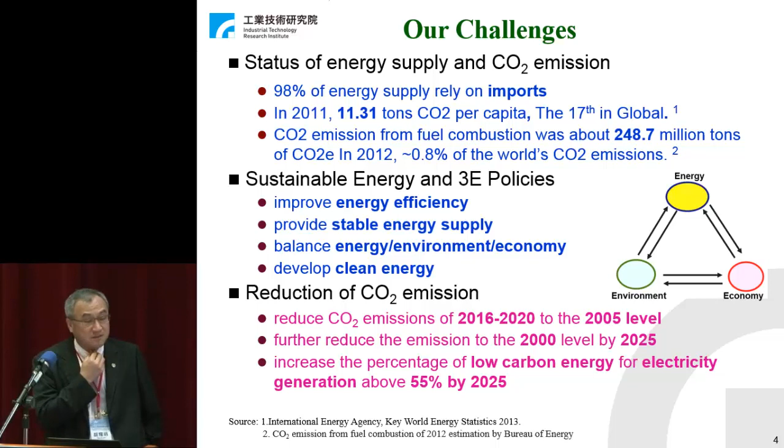For oil and gas, you can just read it—it's very tough. In simple terms, energy efficiency right now in Taiwan is a little easier to reach the target on, but the problem of CO2 emission is very difficult. That's my comment here.

This is our energy consumption pie chart. If you look at the left-hand side, most of the energy consumed is in the energy sector, which generates electricity for people to use. Looking at it differently on the right-hand side, industry consumes most of the energy at 48%, transportation about 14%, commercial and residential combined around 26%, and the energy sector for power plants and home use is around 11%.

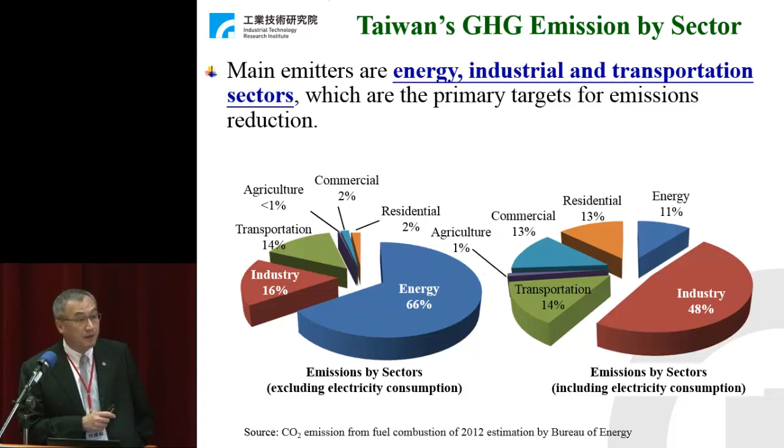Let's take a look at the carbon storage potential in Taiwan. I think our previous speakers were very clear on the differences—they reported on large pilot scale programs around the world. I believe the capture technology is purely R&D, and compared to the storage side, the storage program here is easier than the capture program.

Our storage capacity, from our estimation: onshore we have around 2,800 million tons for the oil and gas structures. Coastal and offshore, we have 9,000 to 68,000 million tons. This is all around the western coast, which is also where all the power plants are. In one way it's good, since most of the power plants and industrial parks are located on the western part, so it's suitable for study, looking at sedimentary basins or rock formations, etc.

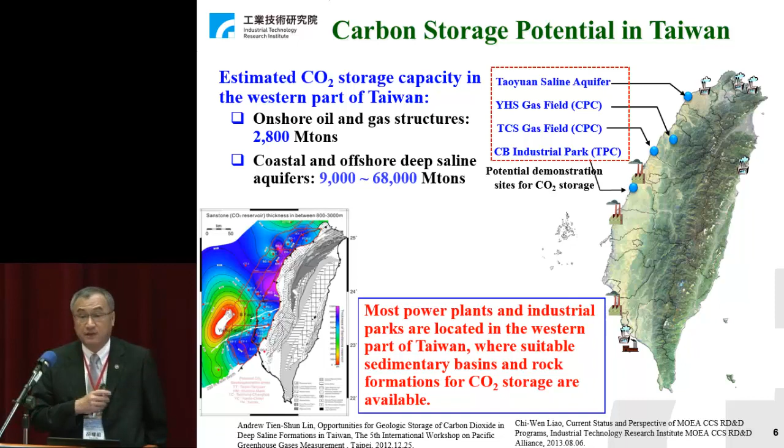In our study, we think the general consideration for CCS research, development, and demonstration—we try to focus on two emitters, I think everybody does the same thing. One is power plants, the large emitter. The other is industrial, like cement, iron, or others. And for carbon storage, we're looking at gas reservoirs here in Taiwan and deep saline aquifers.

I think technology integration is important here. It doesn't matter which way you go—how to make it work, how to make it cost effective, and improve the energy penalty. This kind of thing is critical.

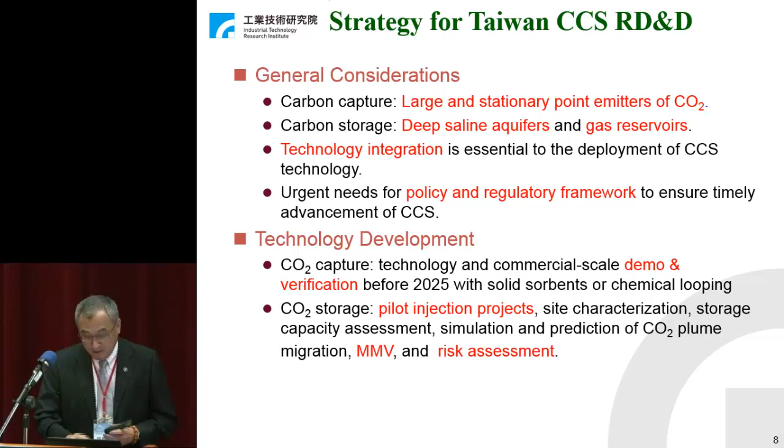But the actual site for injection is not determined yet. This roadmap gives you a brief idea of what we did when we looked over like 10 years ago. We try to make it clear that we have a stepwise approach, and try to make everything clear, scientific data that's clear to everybody. On the capture side, it's running very smoothly according to the roadmap.

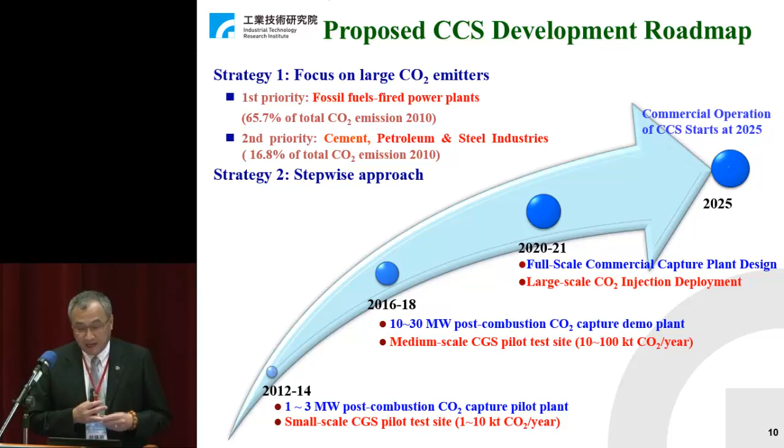Right now, for the storage injection program, we have a little bit of a problem. So this just gives you a broad idea of how we're going to do it. If you're talking about technology, ITRI always uses the so-called technology readiness level to evaluate all the technology, which can be commercialization, which can be the research stage.

And we make it like pilot stage, demonstration, commercialization, deployment. In different technology levels, you will have different projects. According to this planning, you can see up to 2020, most of them are still in the pilot stage or demonstration stage.

We are doing cost analysis and verification, and we try to do small scale demonstration. Later on, I will give you some of the data we have in Taiwan - not only ITRI, but Taipower, CPC, China Steel - they all have programs here.

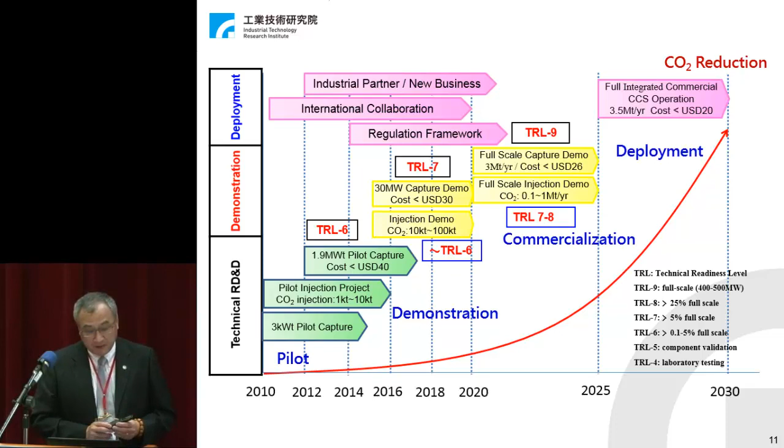This is very detailed, between 3 different organizations which run CCS projects right now: ITRI, of course, and Taipower and CPC, and you can see they have different approaches and different planning on the CCS.

In ITRI, we are doing mostly capture technology, and we're doing site characterization, MMV, and risk assessment. We can help with site disclosure and long-term liability monitoring, but ITRI currently is not going to drill any injection site. The actual work will lead to Taipower or CPC running the storage project.

Right now, Taipower has already drilled 1 hole in the Taichung dumping area, and CPC has a cooperative project with ITRI doing the gas field EGR project. That's in Yonghoshan - I will tell you later.

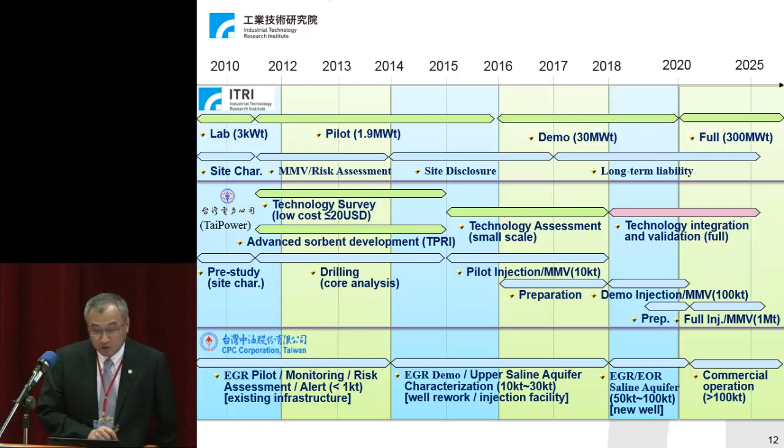But with calcium looping, you can go up to 30 megawatts, and probably later, after we finish the 1.9 megawatt thermal project, we hope in 2020 we can reach about 300 megawatt scale. For new combustion systems, we use chemical looping study, oxy-fuel combustion, coal and biomass gasification - those kinds of things - aiming to use either hydrogen, CO2, or heat reuse for power generation. That's the ITRI planning right now.

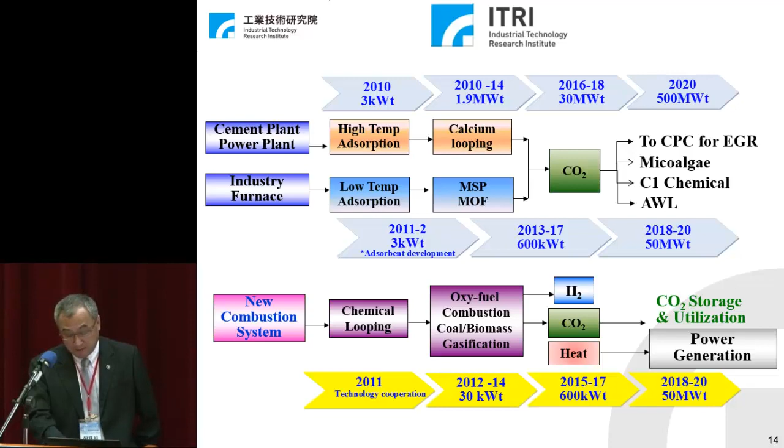We have successfully set up a 1.9 megawatt thermal demonstration unit, an experimental unit in a cement power plant with Taiwan Cement Company. The CO2 capture capacity is 1 ton per hour, and our CO2 removal efficiency right now is 85 to 90%.

We use a rotary kiln with direct oxy-fired design for the calciner, flue gas recirculation for calcination, and our cost estimate to capture the CO2 is to reach like $40 per ton. We have several new patent pending applications in this system. Our next target is up to 30 megawatts, with a cost target of around 25 to 30 US dollars per ton.

Anything will be considered cost effective and high efficiency to improve the energy penalty if you install the CCS unit.

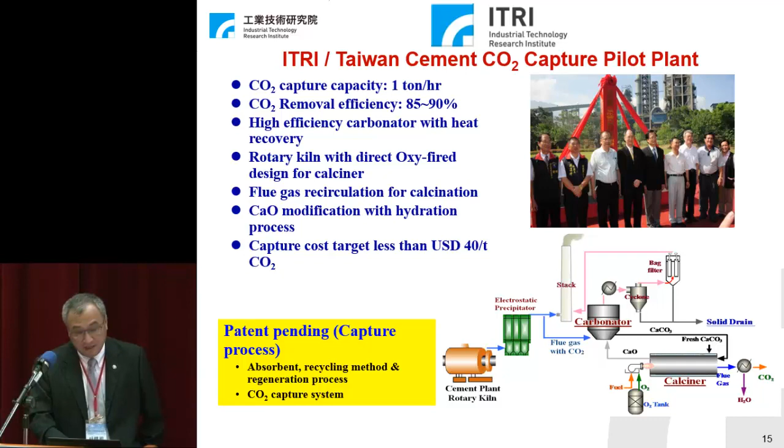For storage technology development, we are most likely focused on monitoring and simulation, site characterization, and those kinds of things. We have not actually planned to drill anything from the ITRI side.

TaiPower, however, has a very successful project in Changbin industrial park, and they drilled around 3,000 meters. But after local resident objection, this project is currently on hold, so they are negotiating how to verify their process. The actual injection has not begun yet, but the site characteristic study of the soil has already begun. This is also their first project of this kind in Taiwan.

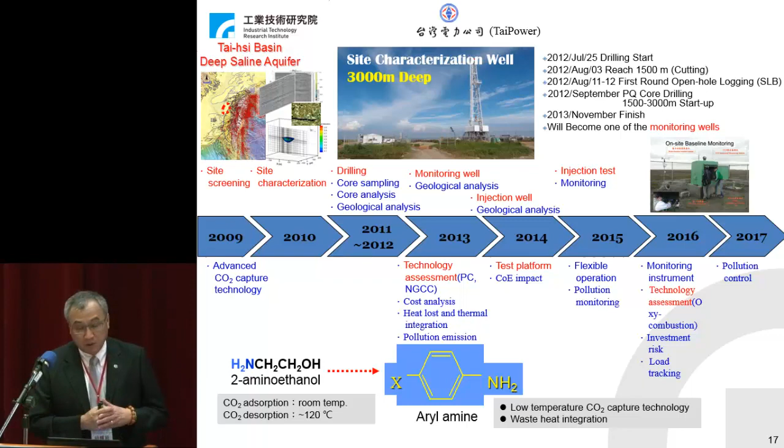We also have a project from TaiPower that uses CO2 utilization for farming algae and photobioreactors, those kinds of things. This is from TaiPower Company. The left one is in Linkou power plant, and this one is in Nanbu power plant.

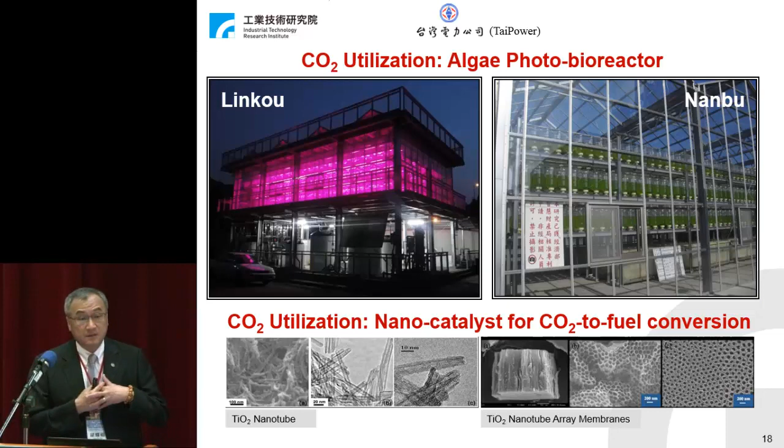CPC's main focus is either EOR or EGR, which is reasonable for them. The EGR phase 1 is being done together with ITRI. We have a small project in Yonghe-san, and all the study has been done, but the actual injection has not begun yet. It also requires communication and negotiation with the local residents.

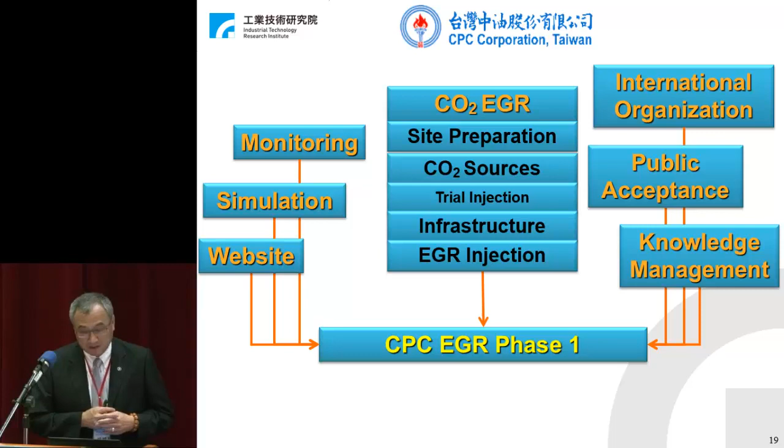China Steel Company also has a project doing this, and this is actually Professor Tan's project. He worked with China Steel Company together to do the CCS project, using waste heat, water slag, and process integration, including ammonia-based chemical processes. After capturing CO2, they also reuse it for farming algae, aiming to lower the cost of energy for CCS.

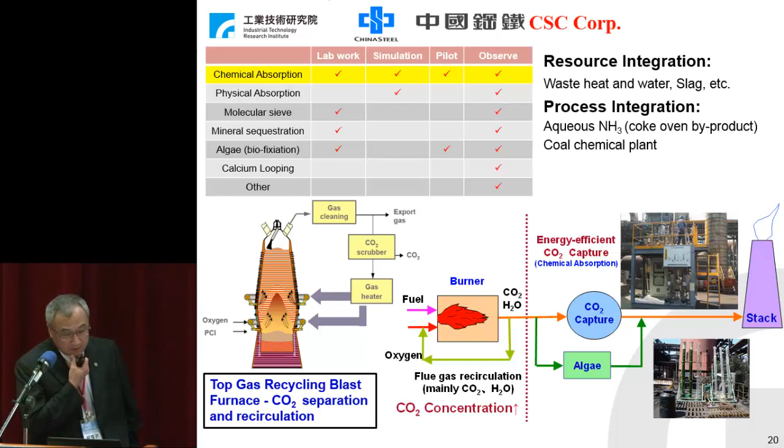In the future, our approach is very similar to what our previous speakers mentioned. My personal view is that you do the technology by research, then demonstration, then deployment. The critical part is still policy and regulation with public engagement. How to persuade local residents to agree, or let them participate in your project, is now critical to CCS.

Capture technology you can develop and use outside Taiwan, but storage should be done within Taiwan. You will not send millions of tons of CO2 to other countries—that's not feasible, and other countries may not allow it either. So CO2 storage is a local problem, and local problems need to be solved by local people. Everybody has to be involved.

This is difficult right now. We have a lot of experience contacting residents of different local counties, and everybody has different thinking and different information. Even the scientific data is not clear right now. So somehow we have to find a general or typical way to communicate with others, otherwise it will be very difficult to continue the storage project here.